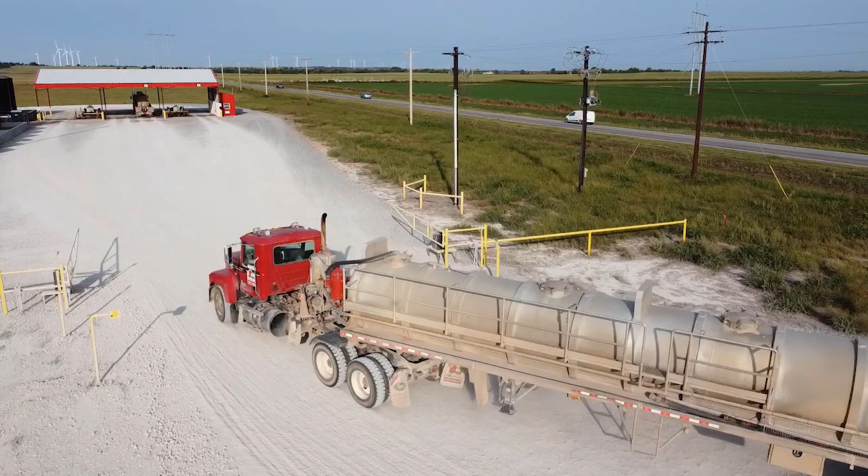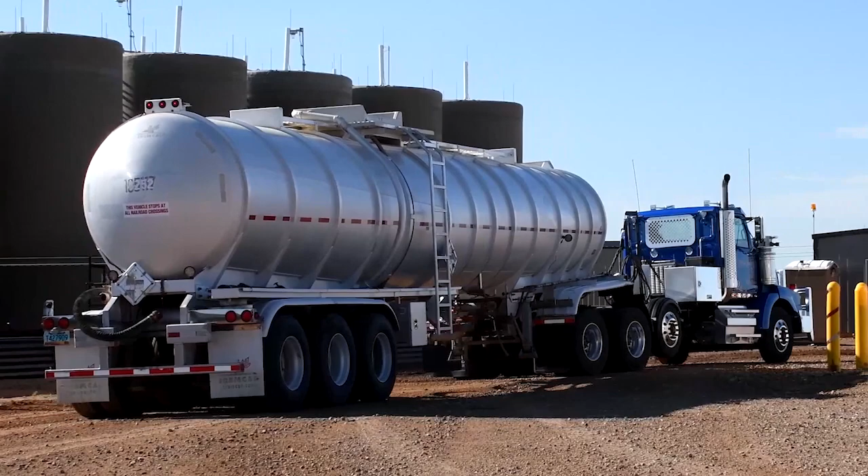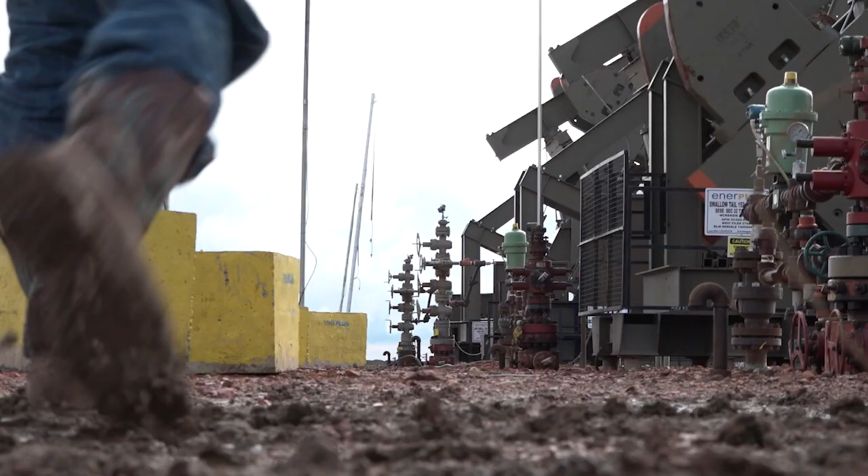Oil and natural gas extraction workers are an essential part of this country's workforce. A critical step in the supply chain is the transfer of oil, gas, and other fluids from wells to other locations for processing. Truck drivers are typically the workers responsible for transferring these produced fluids, including wastewater, flowback, condensate, and crude oil. Depending on the work practices and controls, workers can be at risk for exposure to hazardous gases and vapors, oxygen deficiencies, fires or explosions, vehicle incidents, and heat stress.

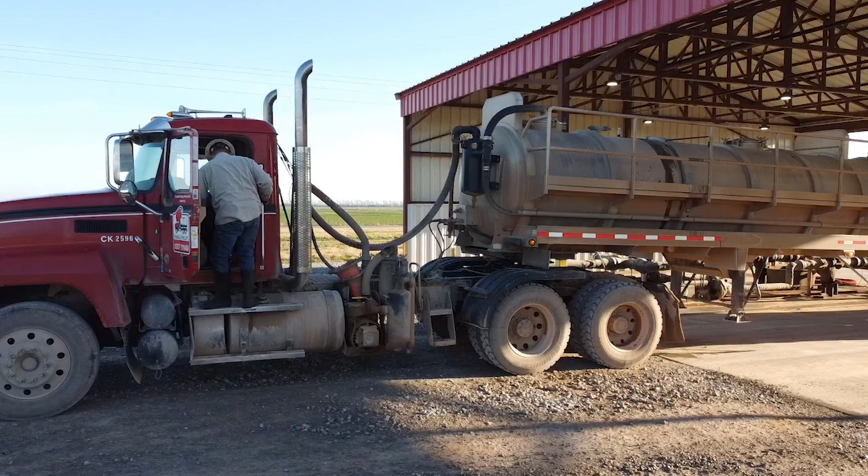Drivers are often alone on site to transfer fluids, making it difficult to get help if needed. This video explains the hazards involved in fluid transfers and provides employers and workers with information to protect themselves so that they can get home to their families at the end of each day.

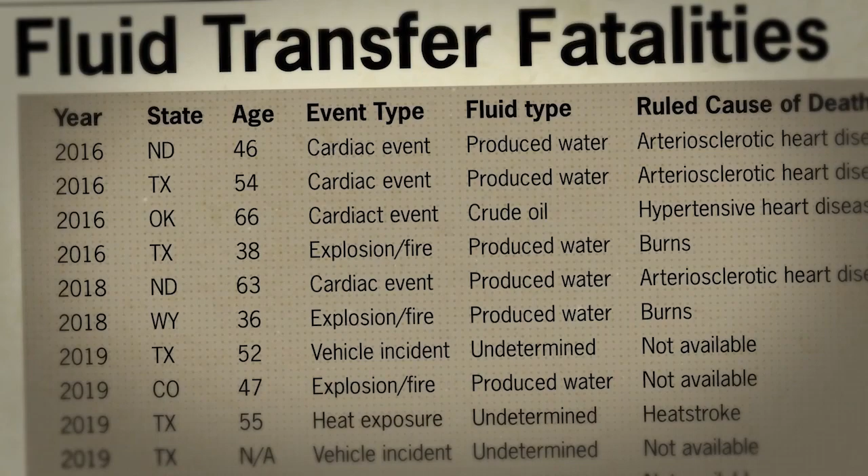During 2016 to 2020, at least 12 workers died while transferring fluids at well sites. These workers died from cardiac events, combustion-related explosions, being struck by a vehicle, hydrogen sulfide exposure, and heat stroke. The hazards and risks involved in fluid transfers are real. As the previous incidents have shown, workers have died while handling produced fluids.

So, what is a workplace hazard? A hazard is something that has the potential to cause harm, including injury, illness, or even death. Hazards are present in every workplace, but most can be controlled. During fluid transfers, flammable atmospheres, exposures to hydrocarbons, low oxygen, and hydrogen sulfide are all hazards.

And what is a workplace risk? Risk is the chance of harm resulting from being exposed to a hazard. The important message is this: you may encounter a workplace hazard or even multiple hazards. But if the employer removes or controls them so you are not exposed to the hazards, then there's no risk of harm. However, if there are hazards and they aren't removed or controlled, then at some point you may be exposed to the hazard and can be injured or even die.

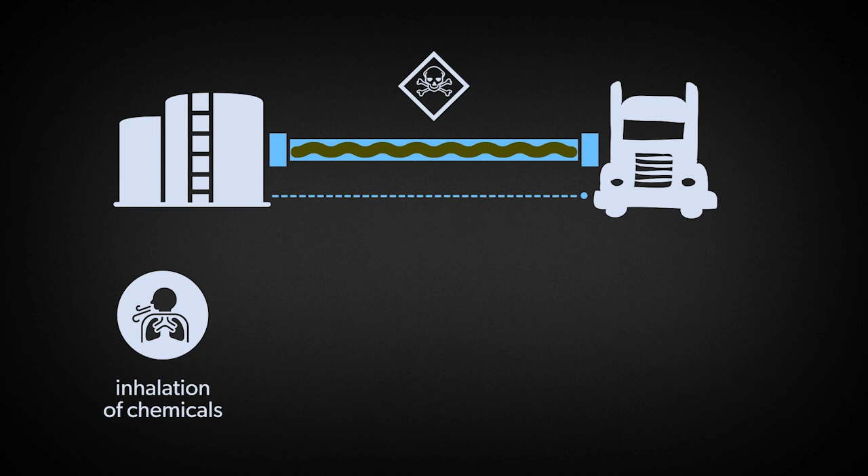Workers can encounter several hazards when offloading or transferring hydrocarbon liquids from storage tanks to trucks. These hazards include inhalation of chemicals including hydrocarbons and hydrogen sulfide, creation of oxygen-deficient atmospheres, and potential for fires and explosions. Exposure to these hazards can result in injury, hospitalization, short and long-term health effects, or even death.

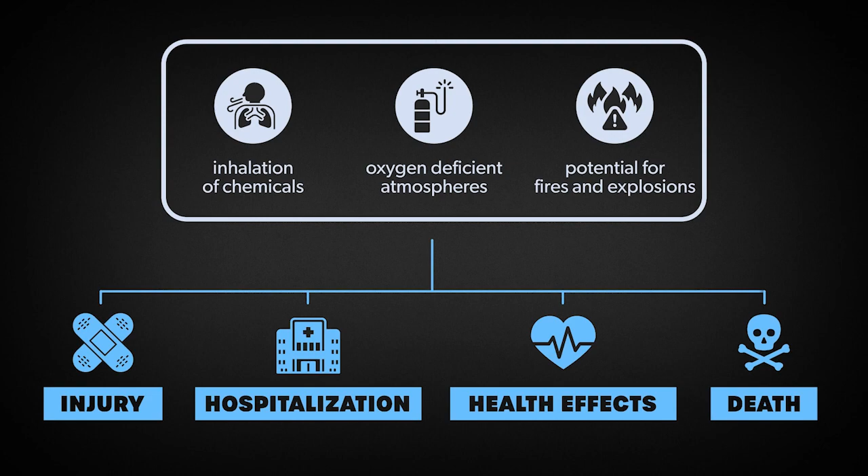The source of these hazards includes the transfer of any produced fluid, including crude oil, condensate, flowback fluids, produced water, brines, and basic sediment and water, or BS&W. It is important to remember that produced water is not just water.

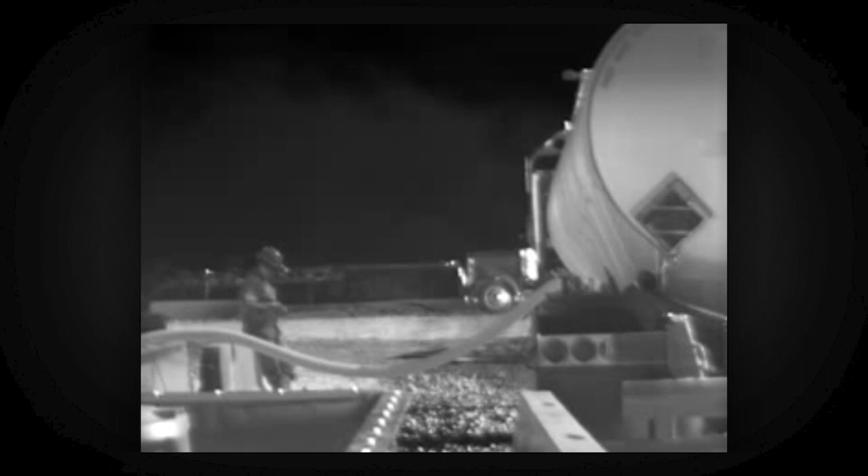When processed fluids are transferred, especially if the tank is under pressure, hydrocarbon gas and vapors can escape, presenting a risk for worker exposures. The plume of gas and vapors can surround a worker, resulting in an atmosphere that may be toxic, oxygen deficient, or flammable, and could even be immediately dangerous to life and health.

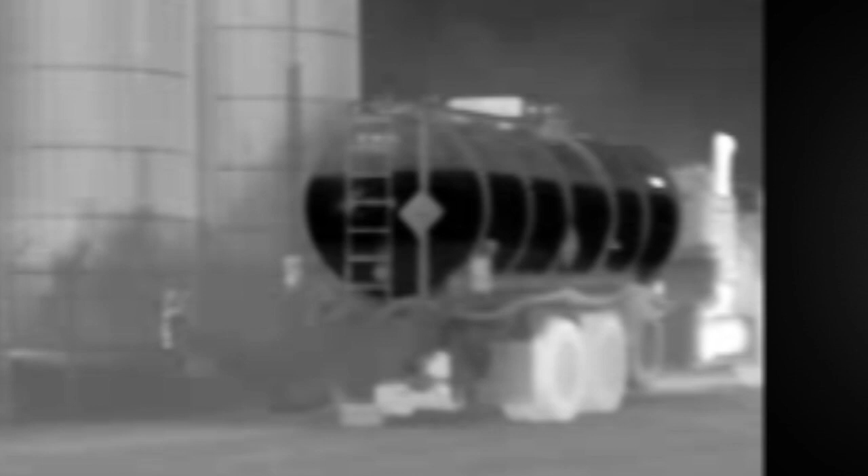Here, an infrared camera allows us to see a gas and vapor plume, which is otherwise invisible to workers. This worker is offloading tanks at a well site, and he is engulfed in the vapor plume because he did not run a vent line from the truck.

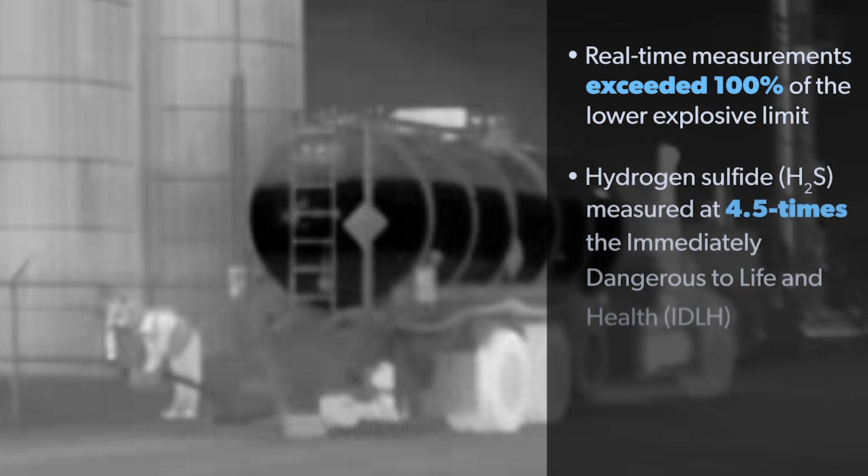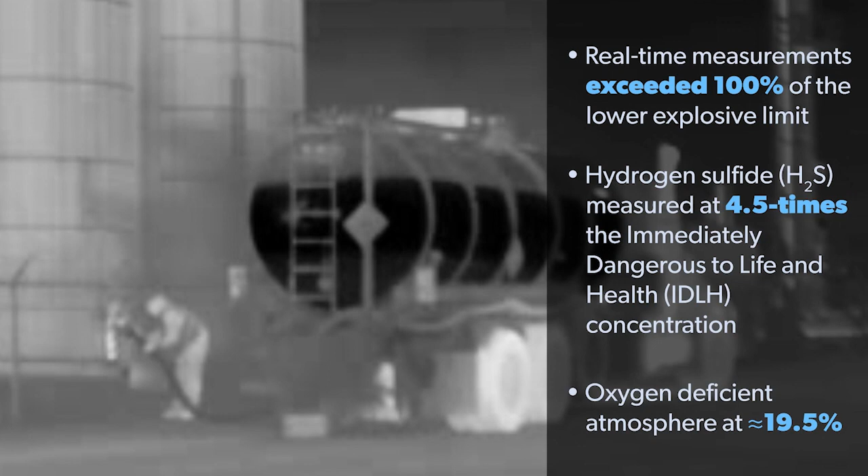This worker was exposed to a fire and explosion hazard, a toxic gas hazard, and an oxygen deficiency hazard. These exposures can affect his eyes, lungs, central nervous system, and can cause his heart to have abnormal rhythms, resulting in dizziness and disorientation, loss of consciousness, and even sudden cardiac arrest.

It's important to remember that all processed fluids are potentially hazardous. This is because they are toxic. In some cases, life-threatening concentrations of gas and vapors can be released. They are flammable. And they are asphyxiants. They displace oxygen and can collect in low-lying areas and confined spaces, and they can migrate. The hazards of fluid transfer and disposal are known, understood, and preventable. So, how do we prevent health and safety risks to oil and gas workers?

During fluid transfers, eliminating or substituting the hazardous fluid is not always possible. So, the use of engineering controls, administrative controls, and personal protective equipment are the main prevention steps used to protect oil and gas workers when they transfer fluids.

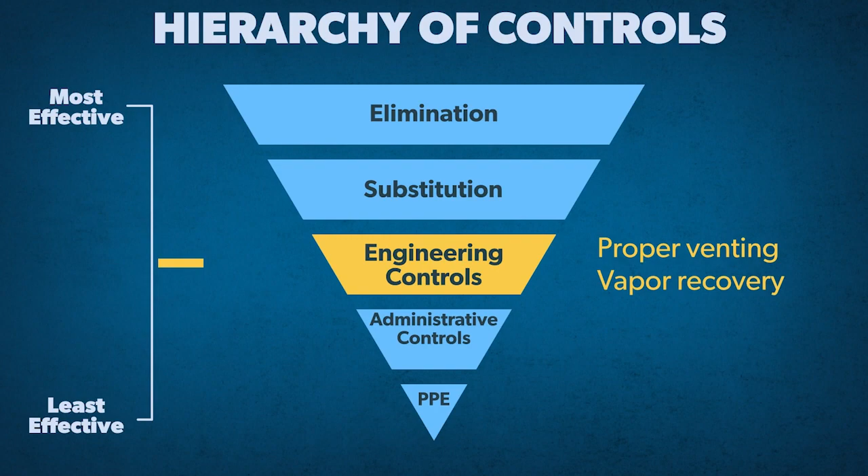Engineering controls are intended to reduce or control the hazard at the source, before it comes into contact with the worker. Proper venting or vapor recovery are engineering controls used by truck operators to safely vent or contain processed fluid vapors away from the worker. To accomplish this, workers should use a vapor recovery unit, or VRU, if available.

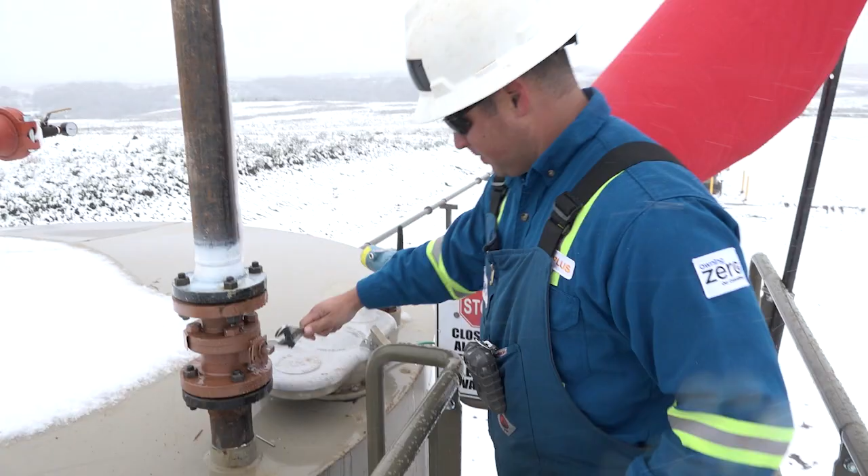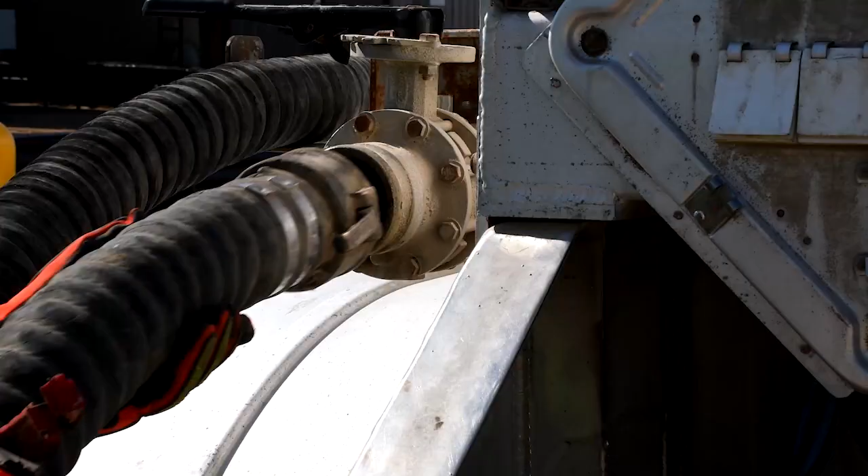Know the wind direction and locate trucks upwind of vapor sources to prevent engine acceleration or runaway. If available, open a pressure release valve for atmospheric stack venting on point sources, such as tanks. Attach a vent line to dissipate vapors from ignition sources, personnel, or other potential hazards.

Be aware that vapors may reach flammable range during periods of low flows, typically in the final few minutes of loading. If multi-gas monitor alarms go off at any time, workers should immediately exit to a safe area.

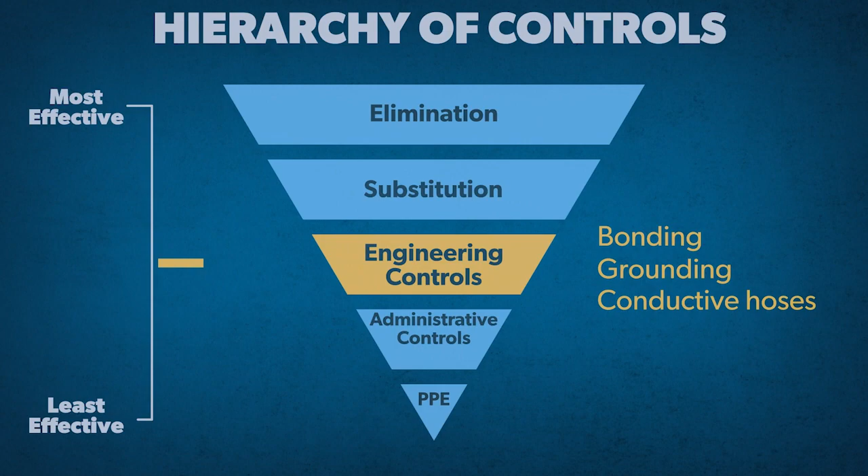Bonding, grounding, and the use of conductive hoses are additional engineering controls that can be used when transferring process fluids. It's important to use conductive hose in closed connections for fluid transfers. Use connectors for bonding and grounding, such as copper wire and clamps.

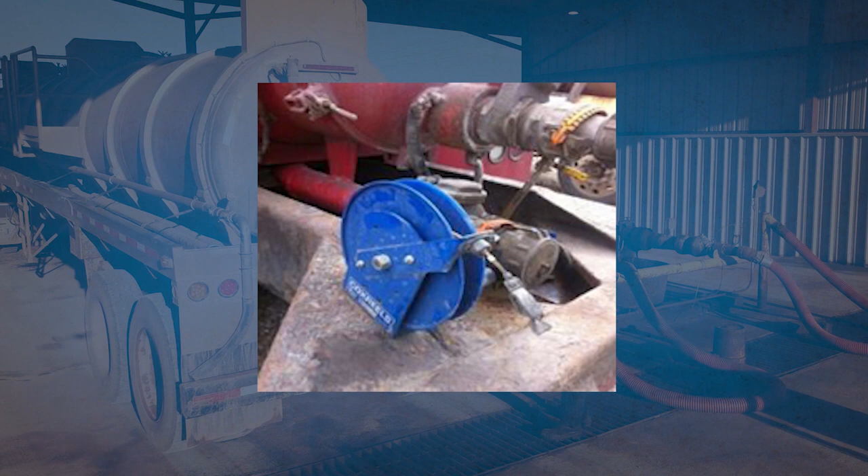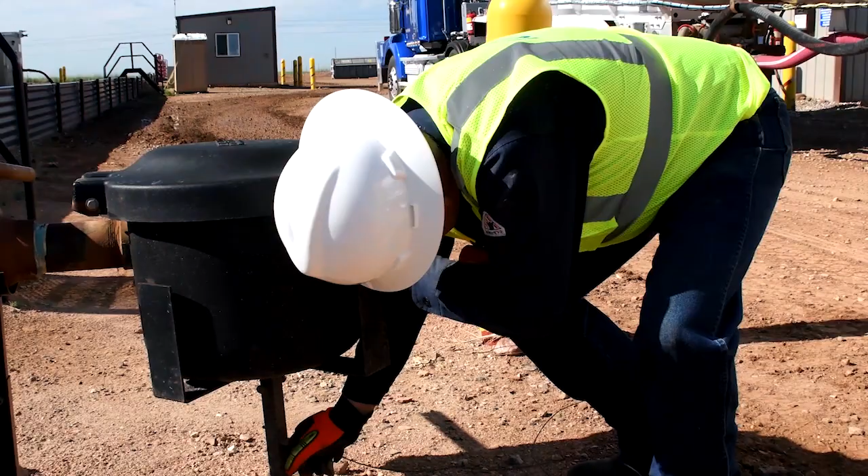To ensure that connectors provide a good conductive path, remove any dirt or debris from the couplings. Use flexible connectors where there is vibration or continuous movement. Connect metal to metal. Only disconnect bonds or grounds once all transfer operations have stopped, and suction nozzle, hose, or tube is withdrawn from the source, receiving tank, or container.

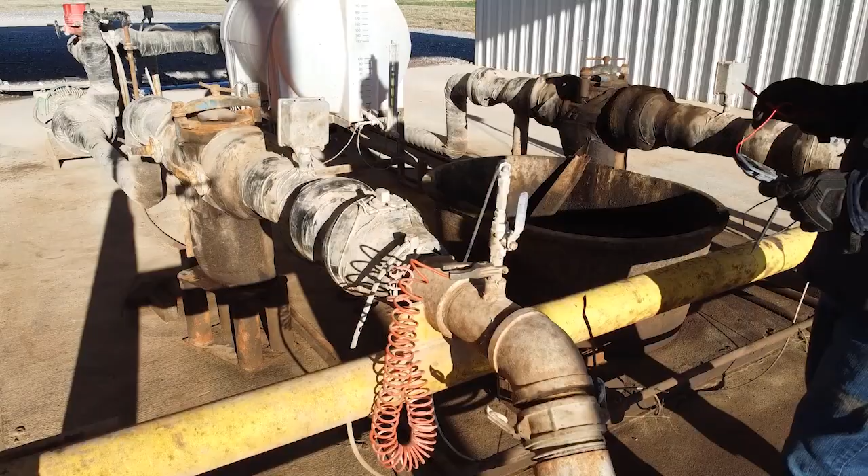Vacuum truck owners should establish a schedule for inspecting and testing the electrical continuity of grounding and bonding. See American Petroleum Institute Recommended Practice 2219 for more information on the safe operation of vacuum trucks in petroleum service.

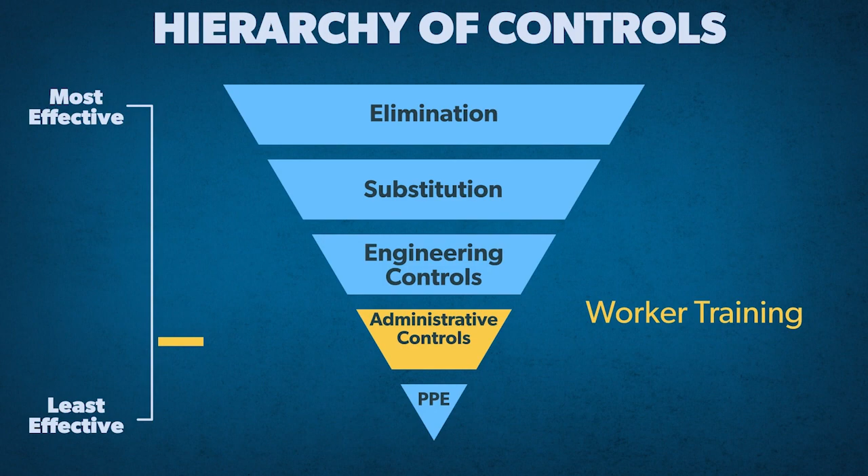Two important administrative controls are worker training and policies and procedures. To keep workers safe, employers should conduct hazard assessments and determine necessary controls to protect workers. Then, develop a job safety and health analysis for process fluids transfers and loading.

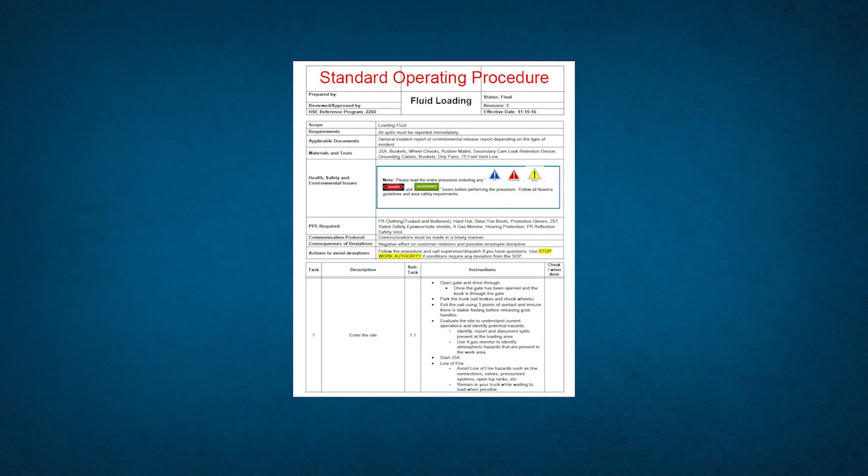Communicate workplace hazards, risks, and controls in a language that workers understand to both off-site contractors and on-site workers through hazard awareness training. Train vacuum truck operators in standard operating procedures and controls that can minimize risks for exposure or injury. See API and OSHA regulation for more information.

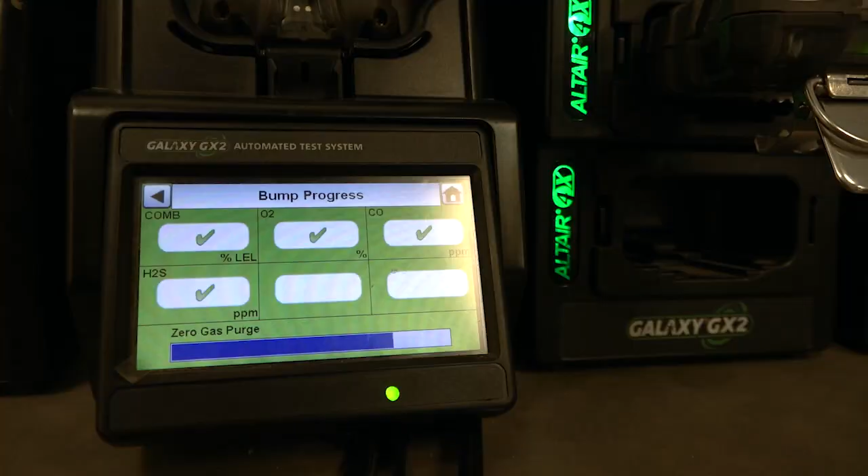Additionally, train workers in the proper use of personal multi-gas monitors and know their limitations and servicing requirements. This includes how to confirm the monitors are functioning properly, that units are placed within the worker's breathing zone, and that the unit has been properly calibrated and tested for lower explosive limit, oxygen deficiency, and hydrogen sulfide. If multi-gas monitor alarms go off at any time, workers should immediately exit to a safe area.

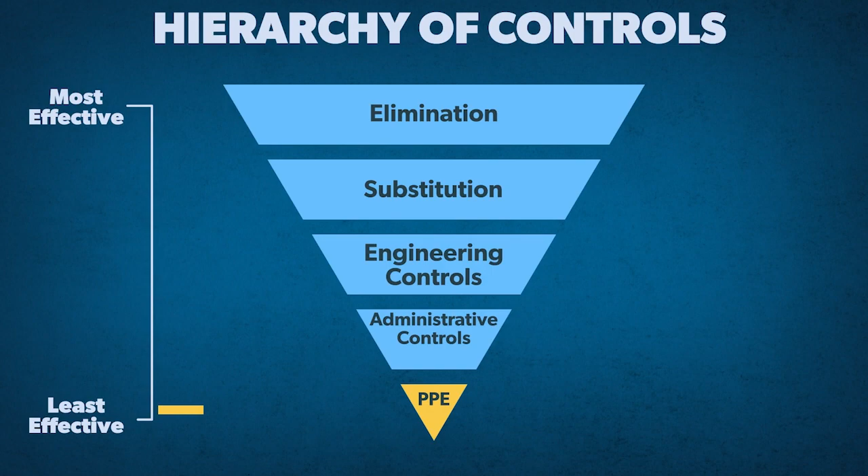Personal protective equipment, or PPE, has been proven to be less effective than other controls, and thus is used as a last line of defense. PPE is chosen depending on the hazard and risk that is identified by the employer, and may include flame-resistant clothing, protective eyewear, boots, and gloves. When respiratory protection is used, a self-contained breathing apparatus, or SCBA, is the most protective respirator against hydrocarbon gases and vapors.

Oil and processed fluids can be transferred and transported safely and with minimal risks. But to do so, employers and workers must understand the hazards, know the risks, and be able to apply the appropriate controls under the appropriate circumstances to control the hazards and mitigate the risks involved. Doing so each time will save lives.